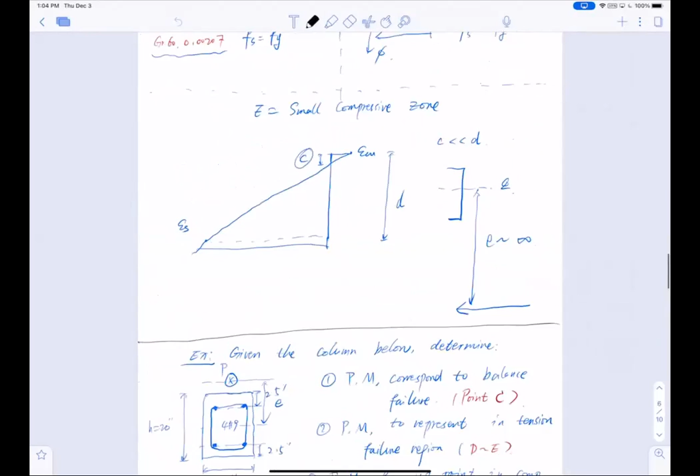All right, so let's continue and quickly recall what we've done so far on the column. This is the critical figure or critical diagram you will need for the final exams. Now, if in the middle of the exam you forgot what we're supposed to do, at least draw the shape of the diagram, and I can give you partial credit for it because this is quite important. So what we're trying to do is get point A, B, C, D, and E, and finish this interaction diagram, and then you can build your design diagram based on this.

I don't think we have time to reach the design part, so for now we're just going to do the analysis. But from these points, you can see that point A, which we talked about, is the pure axial load.

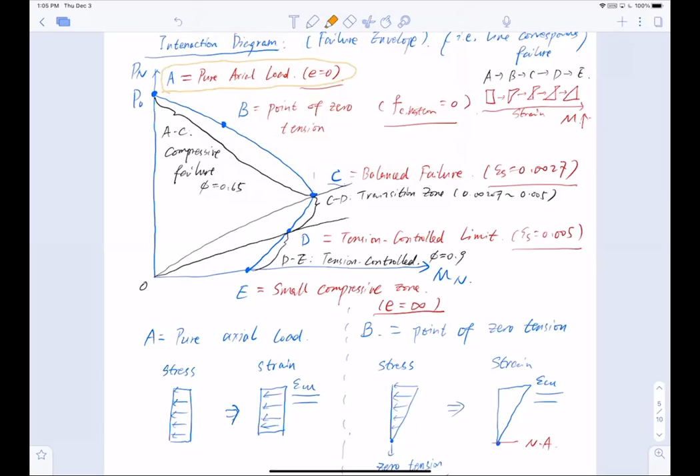That means there's nothing but axial force, right? So for the pure axial load, how to compute that, we haven't shown anything, right? But this is actually the equation for how to compute the axial force, from the beginning of the lecture. So right here, this is the pure axial load, P naught.

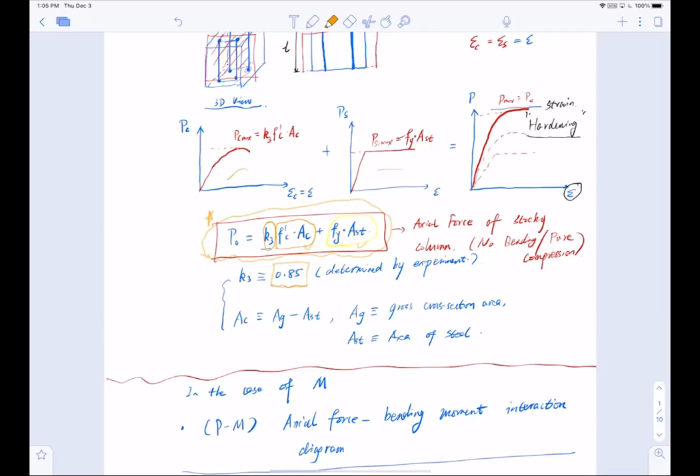It's very straightforward. You just have two parts, one part from the concrete and the other part from the steel, and there's a reduction factor, don't forget, 0.85 in front of the concrete portion. So that is point A, pure axial force.

Then we scroll down the curve, and the next point is the point of zero tension, then balance failure. We have a tension controlled limit, and a small compressive zone point. All these points, as we discussed last time, were controlled by the strain at the tension side of the reinforcement. So depending on the strain at the tension side of reinforcement, you will have a strain distribution, and you can judge which point or stage you're looking at.

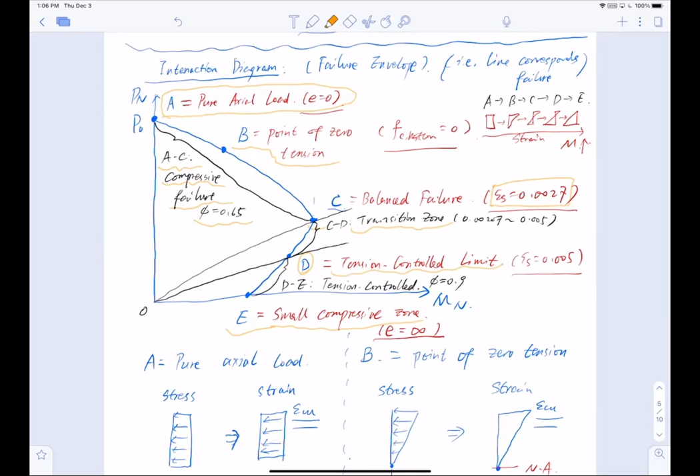By these points, we can divide the whole curve into three stages or zones. We have the compressive failure zone, where phi equals 0.65. We have C to D, the transition zone, with a varying phi. And we have D to E, the tension controlled zone, where phi equals 0.9.

All right, so these are just the corresponding strength reduction factors you need to use to get the strength or capacity. And we talk about how we do the axial forces and bending moments, and we have the equations for them. So these are the moment and those are the axial forces.

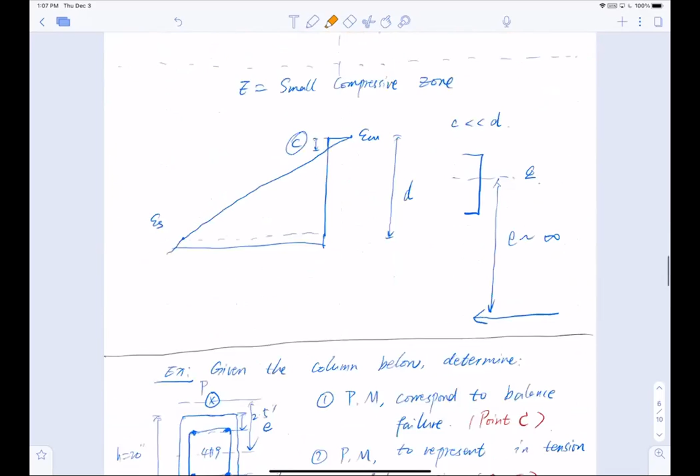Coming back here, we showed the example in last lecture, at the end of last lecture, that we have a section like this, width 12 inches, height 20 inches, bars 2.5 inches apart from the top and bottom fiber, four number 9 bars. And we're trying to find the solutions to the 4 questions here.

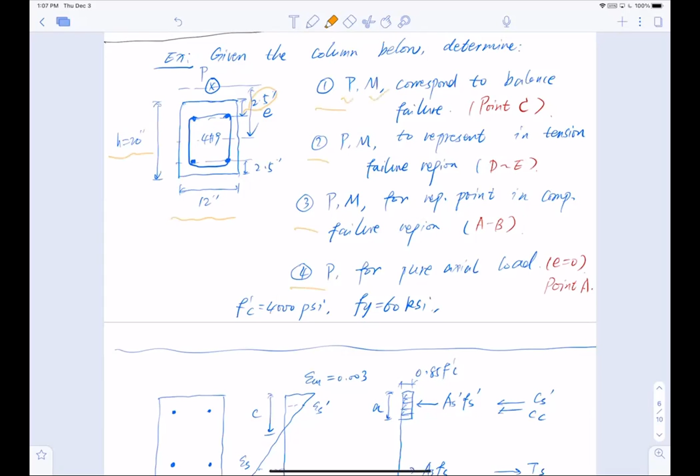The first one is to find the axial force and bending moment corresponding to the balance failure, which means point C. We have gone through that, right? First, we'll show the strain distribution, the stress distribution, and the internal forces.

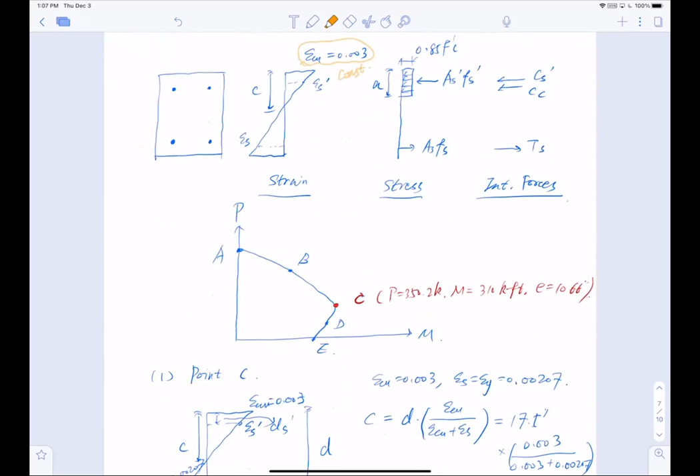For the strain distribution, we know that the concrete is going to fail at 0.003, so that's a constant. Then we show that from the Whitney stress block, you can get the compressive zone C, and get the effective compressive zone A, and then we can compute the stress distribution. That's what we did.

So this is 0.003 compressive failure strain, and I assume it's going to yield because I have a balance failure. It's balance failure, so I know that my tension reinforcement will yield, which has a strain of 0.00207.

With that, I can compute my actual compressive zone C, equal to depth multiplied by the ratio between the strain in the concrete and the strain in the concrete plus the tension strain of the steel. I can find my compressive zone, 10.3 inches, and use the beta-1 Whitney stress block equation to get my actual or effective compressive zone, 8.76 inches.

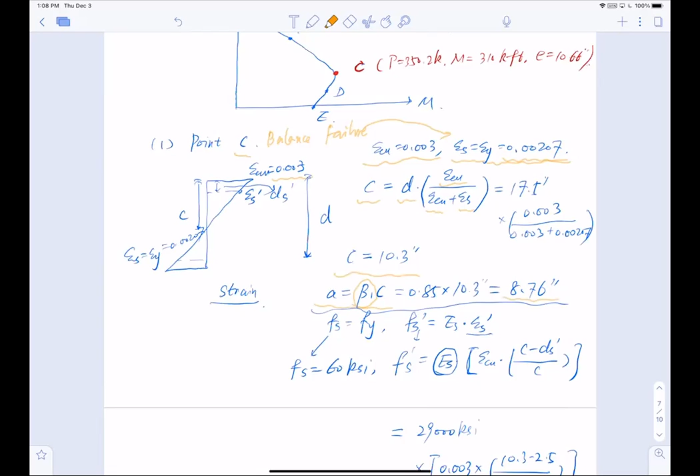With all this, now I can start doing the stress for the reinforcement. For the tension reinforcement, again notice it is balance failure, which means the steel yielded, and it's grade 60. So I know that my tension stress for the steel is 60 KSI.

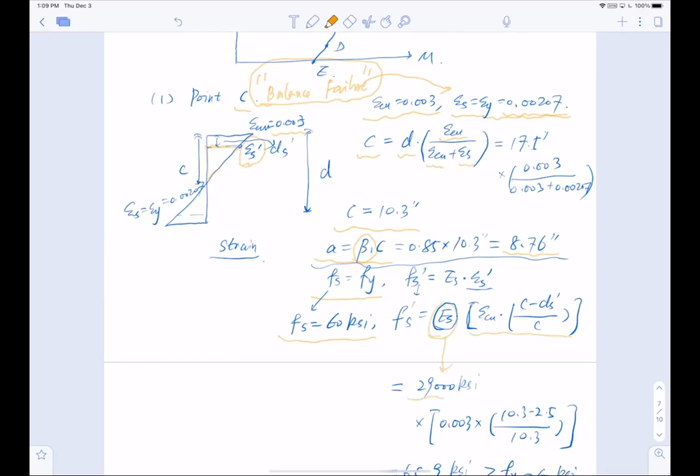Now for the compressive side, I have to run the trigonometry of the triangle here to compute what the strain is in the compressive reinforcement. So I plug in this number, get the strain, multiply by the Young's modulus of steel, which is 29,000 KSI, and obtain the stress in the compression side of the reinforcement.

Compression side of the section, and it turns out this number is bigger, it's 65.9 KSI, bigger than the yield strength of the steel.

Now we talked about this in the beam design section. We said the bar is not allowed to yield in a compressive region. We said that, but this is a column, right? Columns are mainly in compression, hence it is allowed. So F prime S, when it's bigger than 60 KSI, you can set it as 60 KSI. In column design, we do allow compressive reinforcement to yield. Remember that it is allowed.

So with that, we find that the compression force from the concrete is this much, the compression force from the steel is this much, and the tension from the steel is this much.

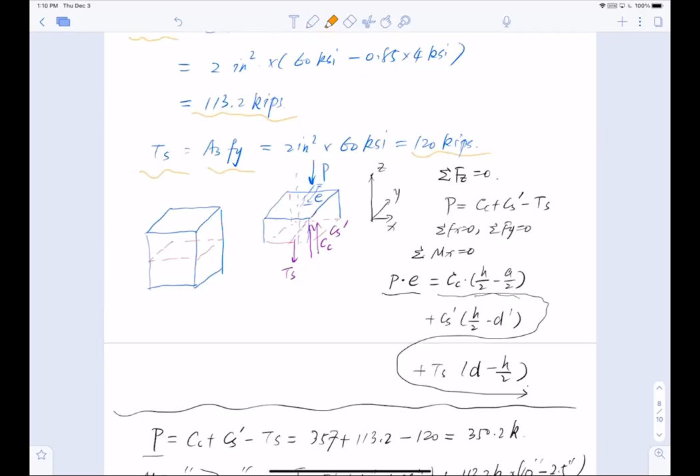And then to get the total compression force in the section and bending moment, we did a free body diagram, right? We make a cut on the column, and the blue ones are the external forces and the purple ones are the internal forces. So the external has to equal the internal, right?

So we do the axial force and we got this axial force to be this much. And we do the moment, sum the moment, we got the external moment P multiplied by E, which E is eccentricity, equal to the moment from the internal forces.

All right, and then we plug in the numbers, we got the compression force to be 350.2 kip and moment to be 310 kip-foot. And we can obtain the eccentricity equal to the moment divided by the axial force, and it turns out to be 10.66 inches.

So every time you want to calculate the point on the interaction diagram, you always need the three numbers: axial force, bending moment, and the eccentricity value.

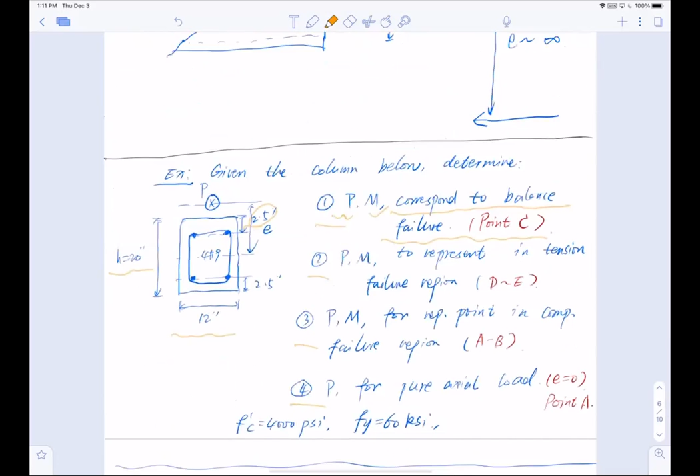Okay, so this caps question number one, right? Question number one is trying to find P, M, and E corresponding to point C, right? Point C is the balance failure. So point C is right here.

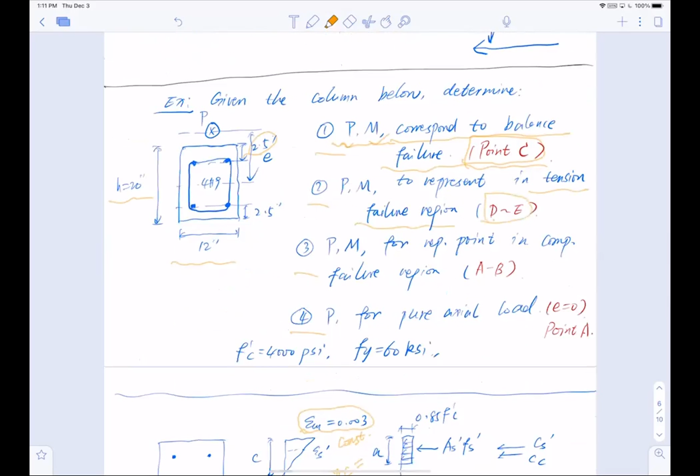All right, then the second question is asking with respect to the tension failure region. That is to pick a point between D and E. Okay, so let's continue and try to pick a point between D and E.

So to visualize it, every time I'm trying to solve the problem, let me get this to be blue. So every time I'm trying to solve the problem, I try to visualize where they are in terms of the interaction diagram, right?

So now in the interaction diagram, it looks like this, and here is P naught, which is point A, and somewhere here is point B, the zero tension point, and point C is here, the tip, and D is somewhere here, and E is somewhere here.

Now this is just conceptual, right? I need some numbers, right? So for C, I know that epsilon S equal to 0.00207 for grade 60, and at D epsilon S equal to 0.005.

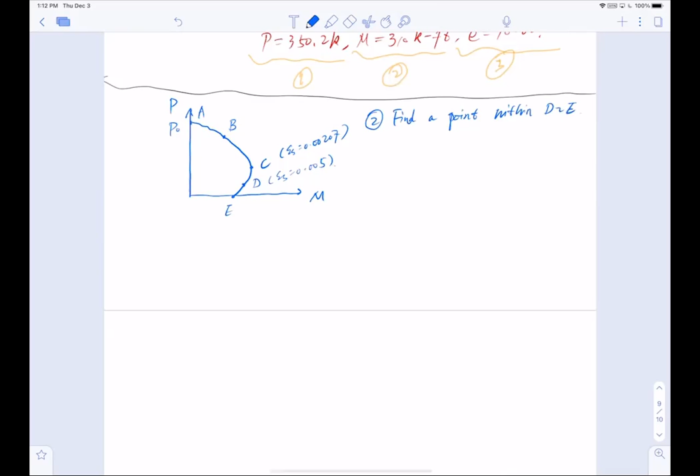All right, so with this drawing in mind, I'm thinking about question number two, is to find a point, basically is to find a point within D, E, right? To find a point somewhere between this region. So I'm just going to highlight it, basically to find a point in this region.

Okay, this color is not good, let me try a different one. Okay, not much better, but anyway, so it's trying to find a point in this region. So which point should I find, right? So I need to pick a point here, basically, right? To find a point here.

So what does it mean, right? This simply means I need an epsilon s that is bigger than 0.005. That's all I need, epsilon s bigger than 0.005.

So which number should I choose? Now, practically, we normally choose epsilon s in this case to be 0.0075, right? And that is the strain on the tension side of the section, okay?

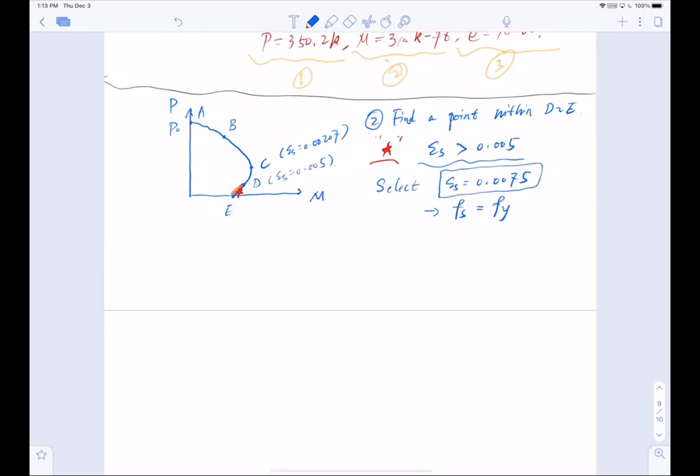Now, knowing that this is much bigger than 0.005, we know that the stress in the reinforcement has to equal the yield strength, has to equal the yield strength. So I can utilize that.

So I can start computing, don't forget this is epsilon cu equal to 0.003, epsilon s somewhere here equal to 0.0075, and bottom section right here. So I can compute my C, which is the compressive zone, using that trigonometry equation, and that is 17.5.

So where does 17.5 come from? That is basically the depth of the beam equal to 17.5. Remember, 20 minus 2.5. So multiply, 0.003 on top, bottom here 0.003 plus 0.0075. Okay, and then I can get the numbers out, and my compressive zone becomes 5 inches.

5 inches, okay. Now I already know Fs equal to Fy, yield stress is fine. So immediately my effective compressive zone equal to 0.85, and this is the beta 1 value. And why is that?

Because we have 4,000 PSI concrete, this multiplied by C equal to 0.85 multiplied by 5 inches, and I got 4.25 inch. So that is an effective compressive zone size.

And with that, I can compute my compressive stress Fs prime. Fs prime equal to 0.003, that's epsilon Cu, multiplied by 5. This is C minus 2.5. Why 2.5? That's basically the distance between the top fiber and the compressive bar, so this is essentially ds prime, 2.5, then divided by 5, and then multiply by 29,000 ksi, which is Young's modulus.

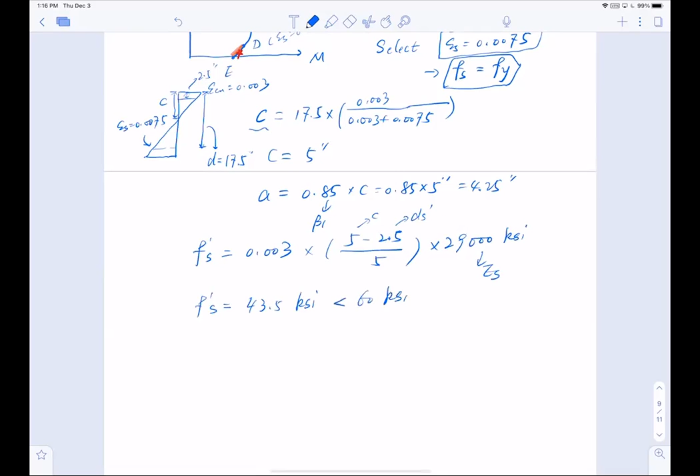So with this, Fs prime equal to 43.5 ksi, and you notice this number is lower than the yield strength of the bar. It can be bigger, but if it's capped, you have to use 60 ksi. In this case, it's smaller than that, so we're fine.

So that is the compressive stress. Now talk about the concrete. The total compression force for the concrete is 0.85 multiplied by 4 ksi, multiplied by 4.25 inch, which is A, and multiplied by the width of it, 12 inch. So the equation is 0.85 F prime C, A and B. So now that is 173 kips. This is the total compression force from the concrete.

Now with that, I can come back to compute the compression force from the steel. So I need the area of steel, AS prime, and I need the stress in that steel minus 0.85 F prime C. What is the compressive area? I have two number 9 bars on the top - this is my section, 20 inch in height, 12 inch in width. So this is AS, 2 inch squared, multiplied by Fs prime, which I just computed is 43.5 ksi, minus 0.85 multiplied by 4 ksi. With that, I have a number of 80.2 kips, that is the total compression force from the steel.

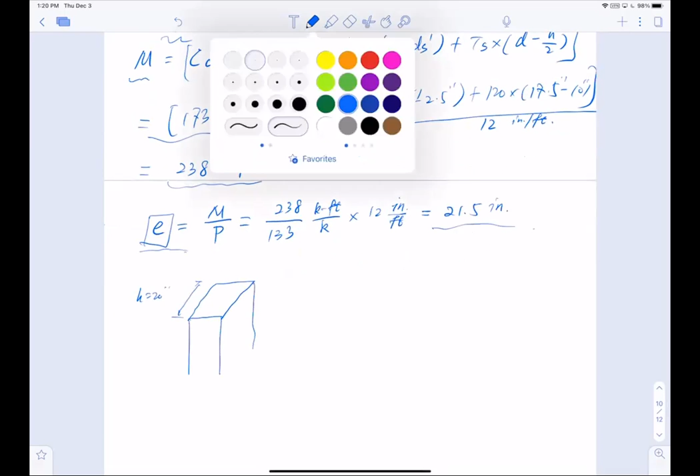Now this is pretty big. Why I'm saying that is because if I draw the cross section like this, this is H, 20 inches, and now I'm having a column in the vertical direction. If I want to label the force, this is the center line, so this is the center point O. If I want to label the axial force, it sits right here, equal to 133 kips, and have a distance of 21.5 inch. Pretty far, right? So the axial force is already sitting outside the section.

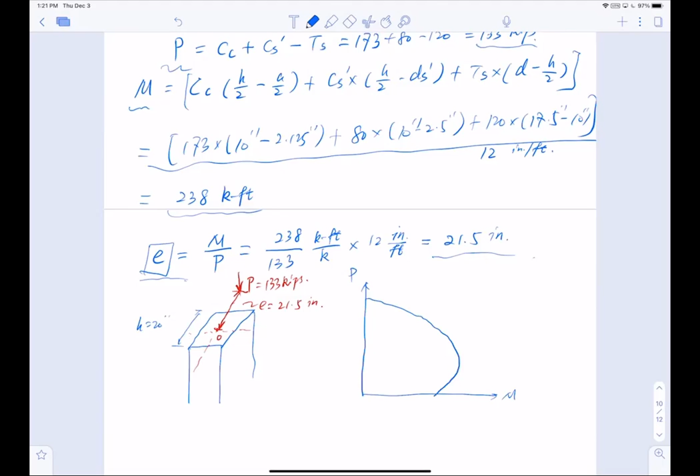So this point right here, and reminder, I'm just going to redraw the force-moment diagram. You don't have to redraw it, you already have it, but I just don't want to flip the pages again. So I know this is A - keep practicing, right? A, B, C. You just want to remember where they're at roughly. And now this point here is somewhere here.

So on this diagram, I have 133 kips of P and 238 kip-foot of moment, and eccentricity of 21.5 inches.

Okay, so that is where I am on the moment diagram, on the interaction diagram. All right, so that is question 2. So I finally got a point that I can have in the tension zone with these numbers.

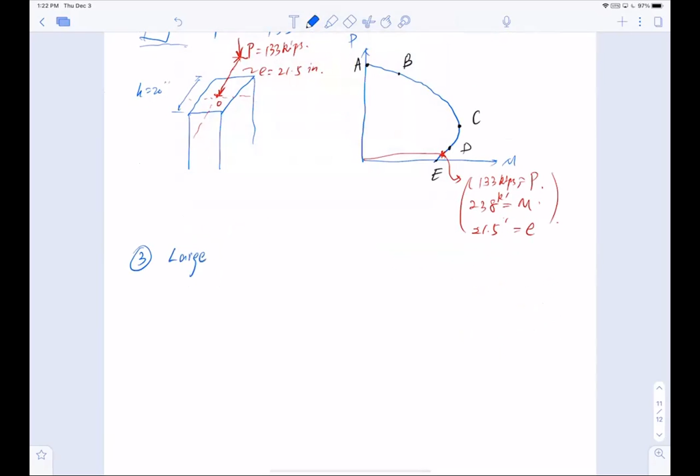So I keep going, and next is to find a point in the large compressive zone, okay, the large compressive zone, right? So compressive failure. What do you mean by compressive failure, right? What is this compressive failure?

That doesn't mean that it's in pure compression or in very limited moment, right? So this is very bizarre, right? Where is it at? What is this point at? We need to find out.

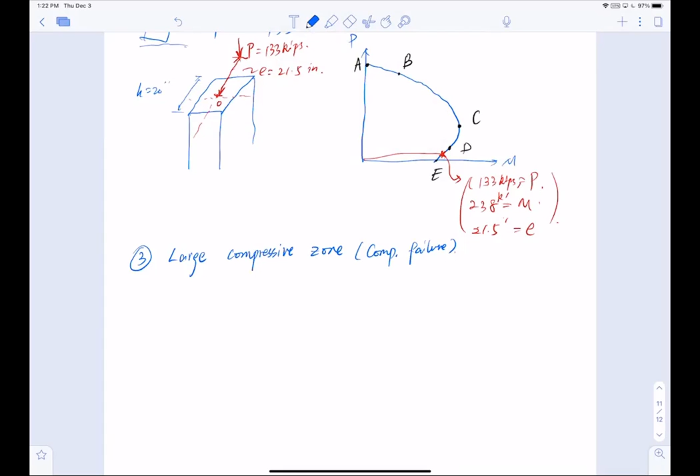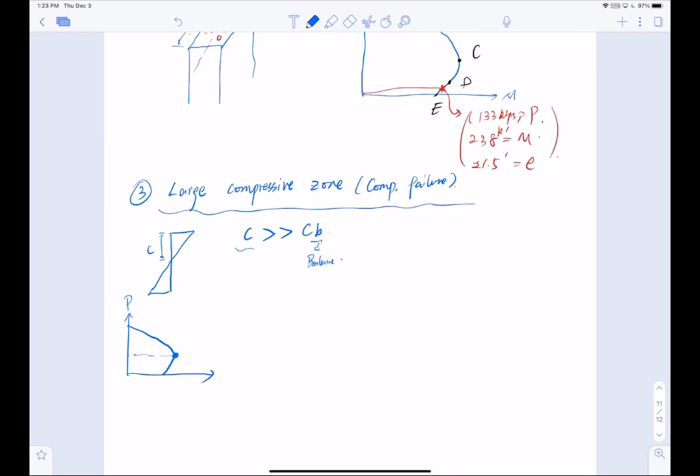So what we're going to do is recognize that this is the large compressive zone. I just want to say that C, remember, this is the compressive zone C, okay? C is large, much bigger than CB. What is CB? Remember in the diagram it looks like this - B means balanced, okay, it's right here. So whatever compressive zone I have at a balance failure, I will have a compressive zone bigger than that - much bigger. So this is C at balance failure.

And this is called fairly large compressive zone. So how large is large, right? How big is big? So what we're going to do is set compressive zone C bigger than the depth of the beam, which is 17.5 inches.

So we can let compressive zone C equal to 18 inches. Now this number is just arbitrary, okay? I just pick a number arbitrarily - I just want to have a large compressive zone, right? So with that, C equal to 18 inches.

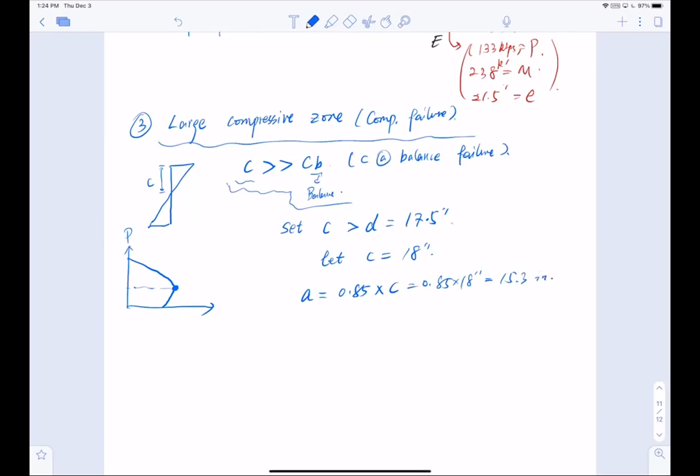I have effective compressive zone A equal to 0.85 multiplied by C, and that is 0.85 multiplied by 18. I have about 15.3 inches of effective compressive zone. Now with that, I can compute my compression force for the concrete, and that is 0.85 multiplied by 4 KSI of concrete, multiplied by 15.3 inches of A, and multiplied by 12 inches, that is the B. So 0.85 F prime C, AB.

So I have 624 kips of total compression from the concrete. Now this is from the concrete. Immediately, I want to find out for the steel in compression.

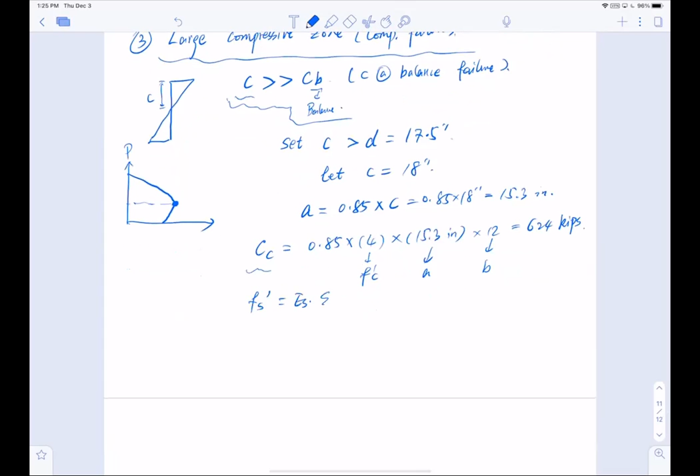So Fs prime, the stress in compressive reinforcement, equal to Es multiplied by epsilon S prime. Okay, and now I need to find out epsilon S prime, right? So Fs prime equal to Es multiplied by the equation for it, which is C minus ds prime divided by C, multiplied by epsilon Cu. You have seen this before. Okay, and I can plug in the numbers.

So this is 29,000 KSI, and bracket inside C, what is my compressive zone size? 18 inches, right? And ds prime, the distance between the top fiber to the compressive reinforcement, which is 2.5 inches, divided by 18, okay? And multiplied by 0.003. So the whole thing comes out to be Fs prime equal to 75 KSI, which is much bigger than the yield strength of the bar, which is 60 KSI.

Now, if this were at the beam section designed for a reinforced beam, that's not good, right? But in this case, since it is for a column, it's okay - it can yield, but it has to be capped at 60 KSI. Has to be capped at 60 KSI. So in this case, we'll just say Fs prime has to be equal to 60 KSI.

All right, so I got compression from the concrete, I got compression from the steel - well, not yet, but I got a compressive stress. That's as good, right? Now I need to get the tensile strain of the steel, which is epsilon s.

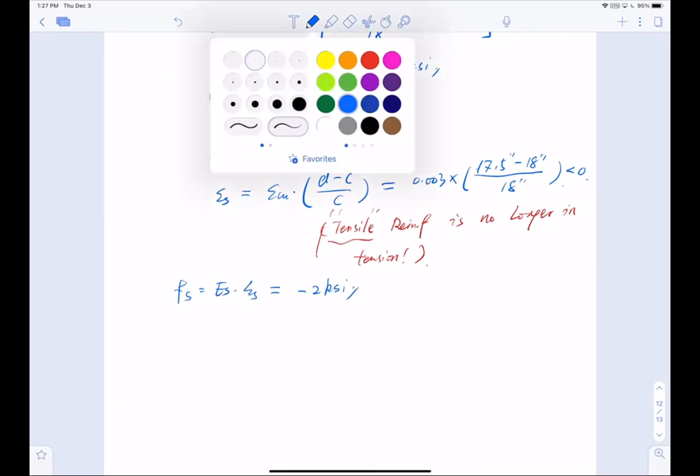Turns out this number is a negative value. What happens? It means that my tensile reinforcement, which is supposed to be in tension, is no longer in tension. Because we're in a column, the reinforcement is now in compression. I can compute this: Fs equals Young's modulus Es multiplied by epsilon s, and this number turns out to be negative 2 KSI. But because we're dealing with a column, that's okay.

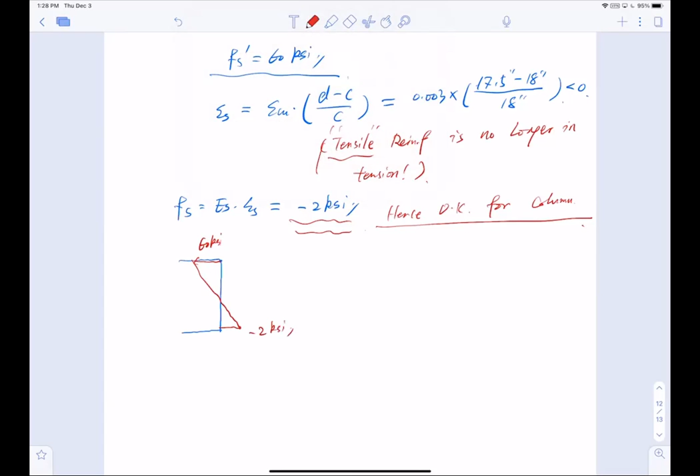What does it mean? It simply means I have a section where both the top and bottom parts have a different stress state - the tension and compression swapped. On the top side I have about 60 KSI of stress, and on the bottom side I have negative 2 KSI. So I switched the orientation of reinforcement in a sense.

But this doesn't change the fact that I can still compute my axial force equal to compression from the concrete plus compression from the steel, minus the tension from the steel. So I have 624 kips plus 60 multiplied by 2, because I have 2 number 9 bars, minus negative 2 multiplied by 2. So I'll have 748 kips of total compression force.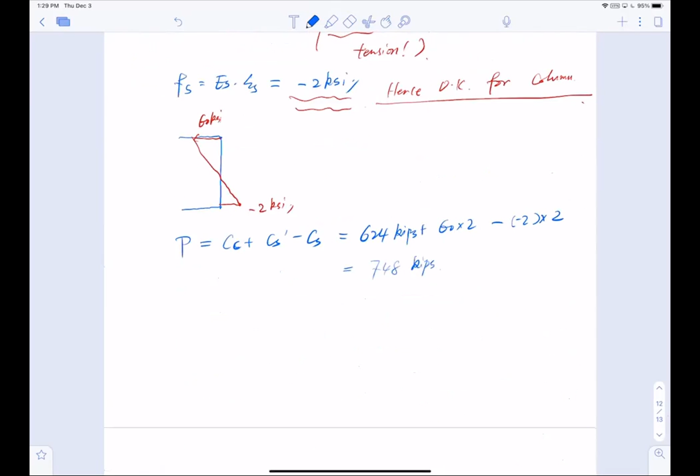Now I can compute my moment using the same equation as before - I won't repeat myself, just plug the numbers in. 624 multiplied by 10 inches minus 7.65 inches - where does the 7.65 inch come from? This is basically half of A. Plus 120 multiplied by 10 inches minus 2.5, you've seen this before. Then minus 4, which is the negative force from the bar, times 17.5, which is the depth minus 10 inches. This whole thing divided by 12 inches per foot converts everything back to kip-foot. So the moment equals 195 kip-foot.

Now with the compression and moment known, I can compute my eccentricity equal to E equals M over P. Moment is 195, a small number, axial force is 748, a big number, so I get my eccentricity to be a very small number, 3.12 inches.

Just want to have a visual of where we're at. So this is again the section - I'm drawing the side view. This is 20 inches, and it goes like this. If I draw the center, my P is sitting somewhere right here, with an eccentricity distance of 3.12 inches.

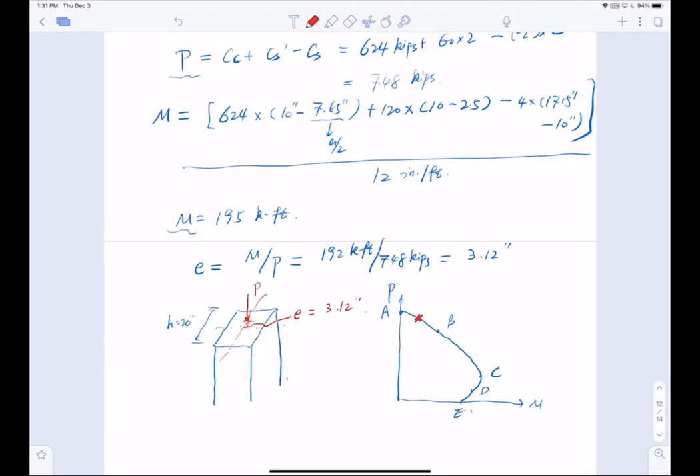This is very close to the pure compression case. If I want to draw it in a diagram - so this is the curve, and we have A here, B here, C here, D here, E here. So this point is roughly right here. Now you may argue, is it before B, between A and B, or B and C? Think about it - for point B, I need to have zero tension, but now I have compression. So I'm having a point between A and B.

So this is problem number 3, and problem number 4 is just the pure compression case. That means for pure compression, I have compressive zone equal to infinity - the whole section is in compression.

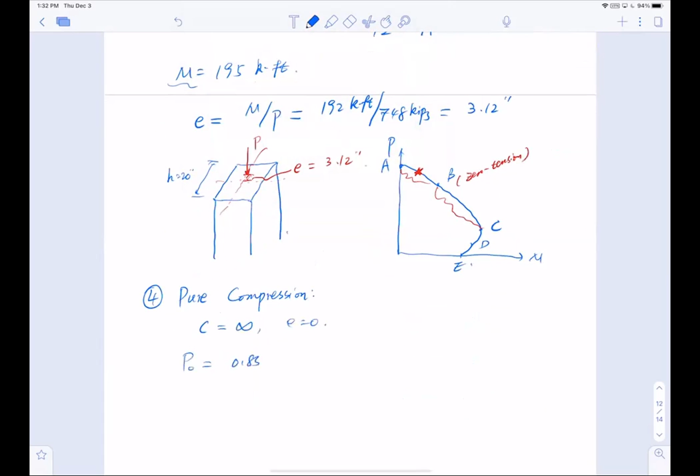Eccentricity equals 0. So P-naught, the axial force, equals 0.85 F prime C multiplied by the gross area AG minus the reinforcement area AST, plus Fy multiplied by AST, yield strength multiplied by reinforcement. This is different - this is the equation we use for pure compression of the column, a stocky column, where there's no moment, just compression.

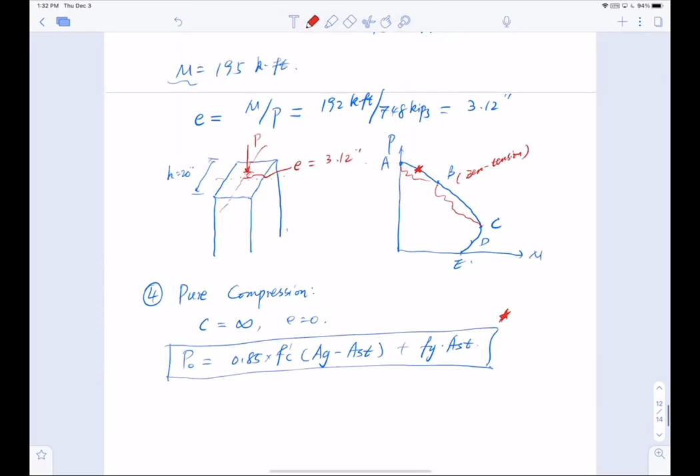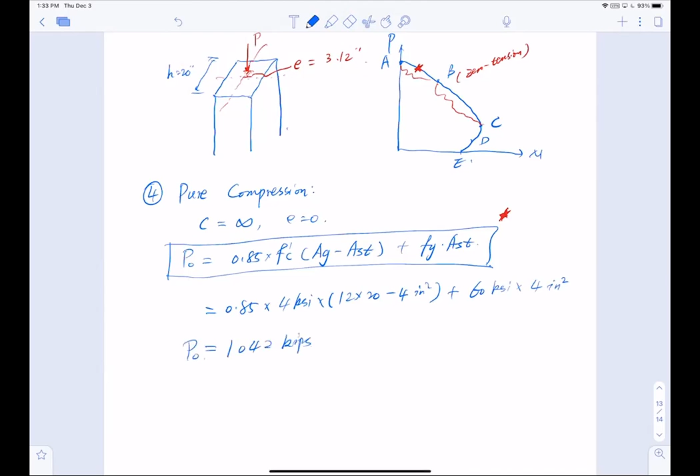I bring the numbers in: 0.85, 4 KSI, total area of 12 inches multiplied by 20 inches, minus 4 bars, plus Fy 60 KSI multiplied by 4 bars, 4 inches squared. Now I have a total force of 1,042 kips for the pure compression case. So this is easy - we have all the points calculated.

I want to see where they're at, so I'm going to put them all on this interaction diagram. I have my axial force on the y-axis, bending moment on the x-axis - where are they at? So the first point here is P0, the axial force, and this is 1,042 kips.

Okay, 1,042 kips. And now, if I draw a vectorial line from the origin to this point, I want to mark my eccentricity. So eccentricity for this case is 0. This is pure compression. This is point number 4.

Next point, number 3, I have P equal to 748 kips, moment equal to 195 kip feet, remember? And now if I draw a vectorial line here, the eccentricity equal to 3.12 inches.

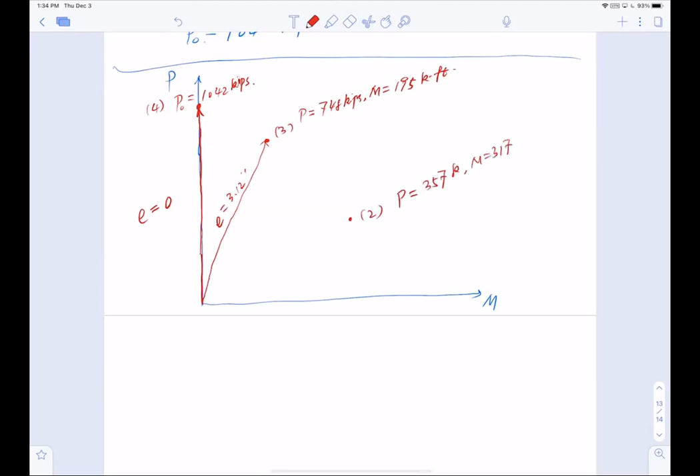Okay, now point 2 is my balanced failure, right? Remember, it's the tip of my curve, and I have my axial force equal to 357 kips, and my moment equal to 317 kip feet. And if I draw a line here, my eccentricity equal to 10.66 inches.

Okay, and then a representative of the tension side, I have axial force of 133 kips, moment of 238 kip foot, and eccentricity of 20.83 inches. All right, so these are the 4 points that we just calculated.

These are the 4 points we just calculated. So to draw the interaction diagram, I just simply have to connect the points. And this is my interaction diagram.

This is the interaction diagram. And if I want to mark a point, I didn't calculate this, but this is E equal to infinity.

All right, so that's it, folks. All we have to do is, in the exam, we'll give you a point. You just need to calculate a point and show its relative position on this interaction diagram.

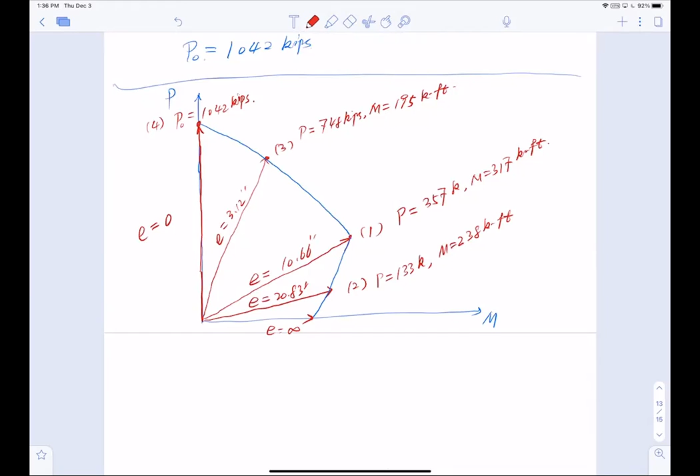Folks, any questions? Hey Bob. I actually had a question on homework 10. So what is the difference between 2A and 2B?

So 2A is asking extending into the wall, and 2B is asking extending into the beam. I mentioned that in last lecture, if you remember. It's all about the position of the bar.

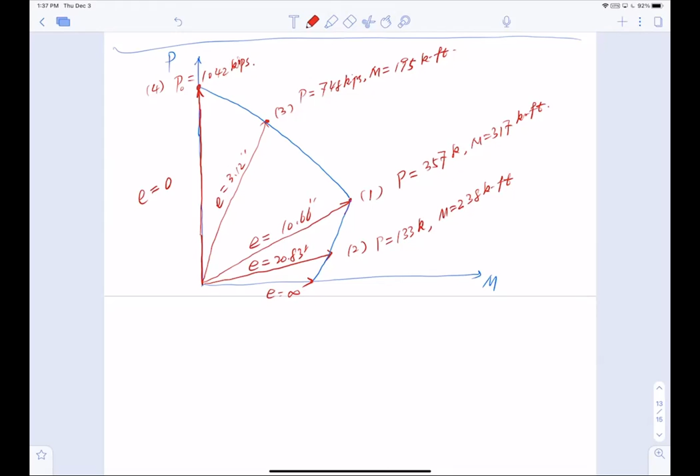Better? Yeah, okay. I know you mentioned it yesterday, and I thought I understood it at the time, and then I got to the homework and I forgot it. Sure, no worries. Okay, so try it again. If you still have a question, email me, okay? All right, sounds good, thank you. Yeah, no problem. Anything else?

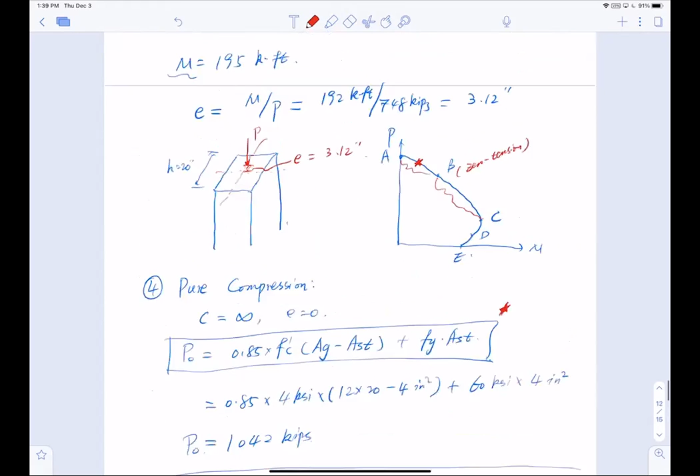Can you go up to 0.3? I just missed something when I was taking notes. Sure. Right there is fine. Oh, here? Yep, right there. Okay, so let me stop recording. I think most questions probably...